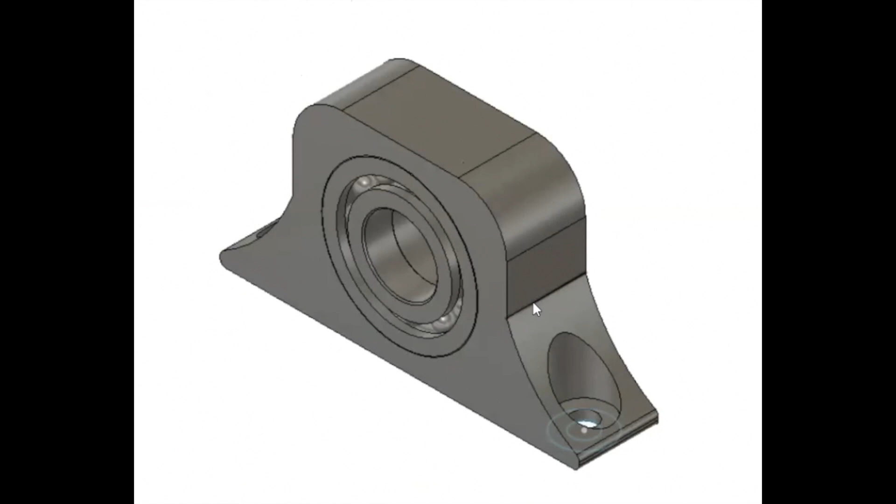The first thing we're going to do is go into the McMaster Carr catalog and search for a bearing. The bearing we're going to use is 3/4 inch diameter on the inside and 1.625 inches on the outside diameter.

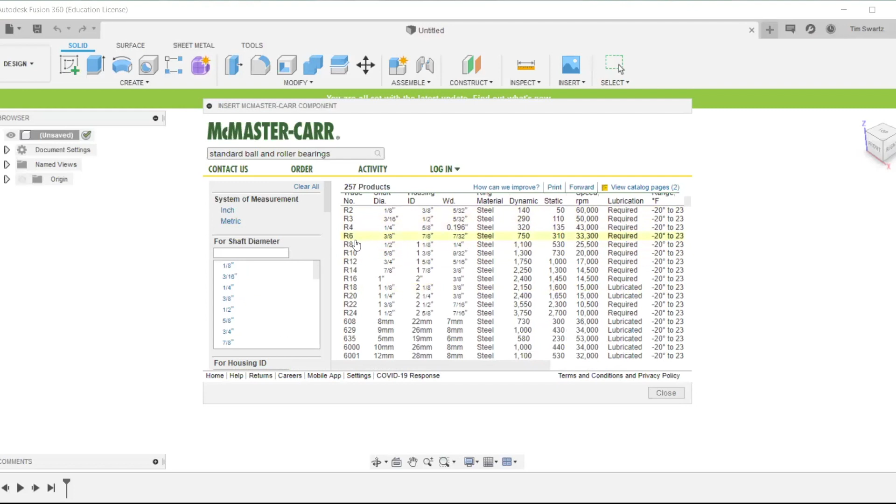We can see that in the specifications when we pull this product up. We'll scroll down here, and right now we're going to save it, and that's going to directly import into our drawing.

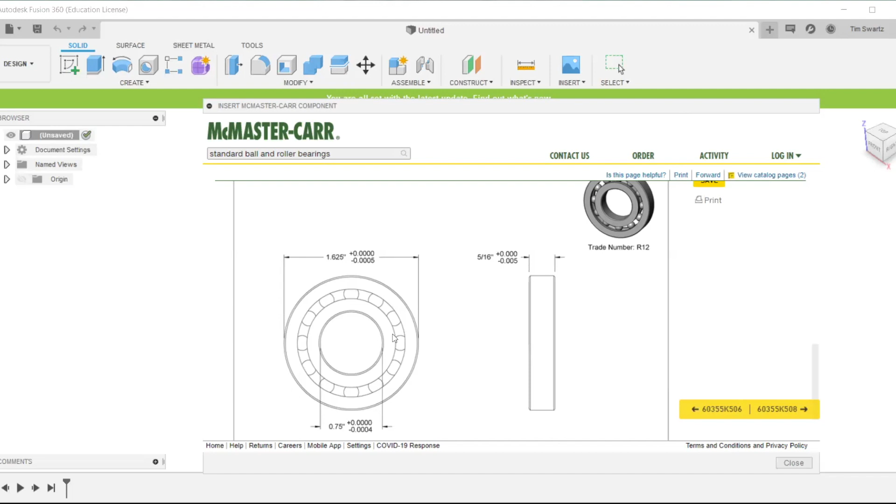Take note of the dimensions of the bearing. You can see that it's 5/16 wide, it's 1.625 inches across, and its inside diameter is 0.75.

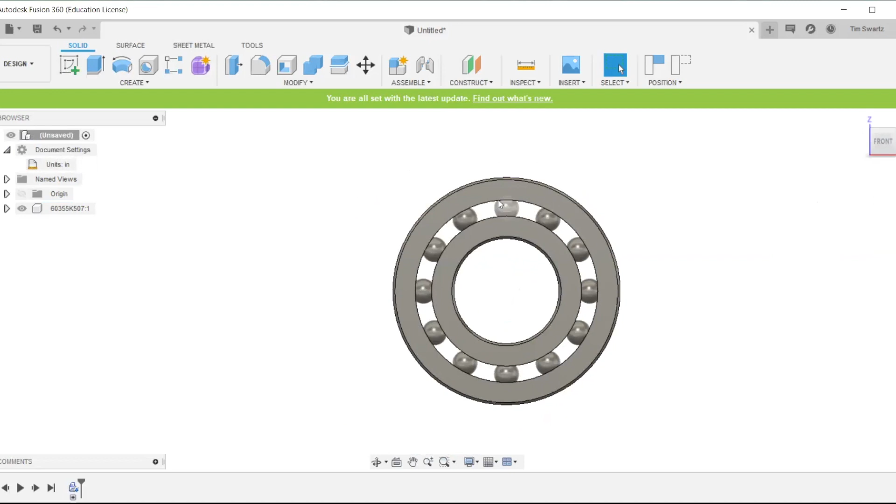Now that it's imported, we're just going to arrange it how we want it, so we want it front facing. One thing we need to adjust is the units that the program is in, so we're just going to switch that over to inches since this bearing is in inches.

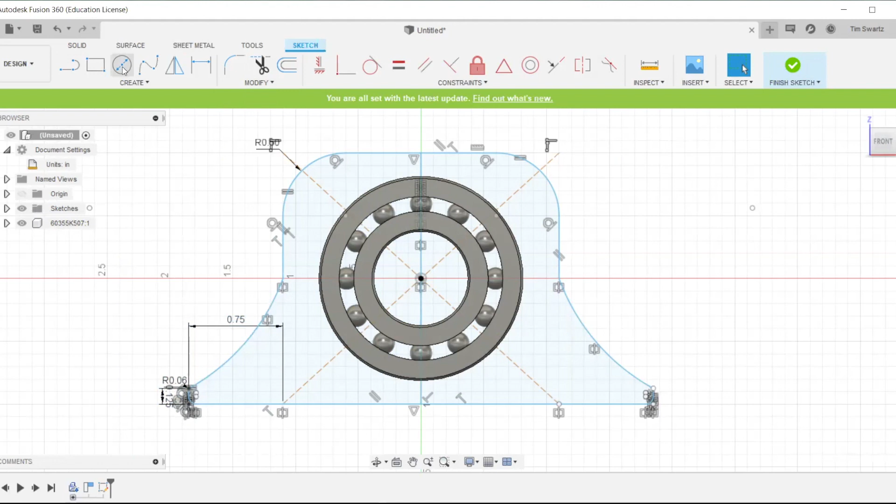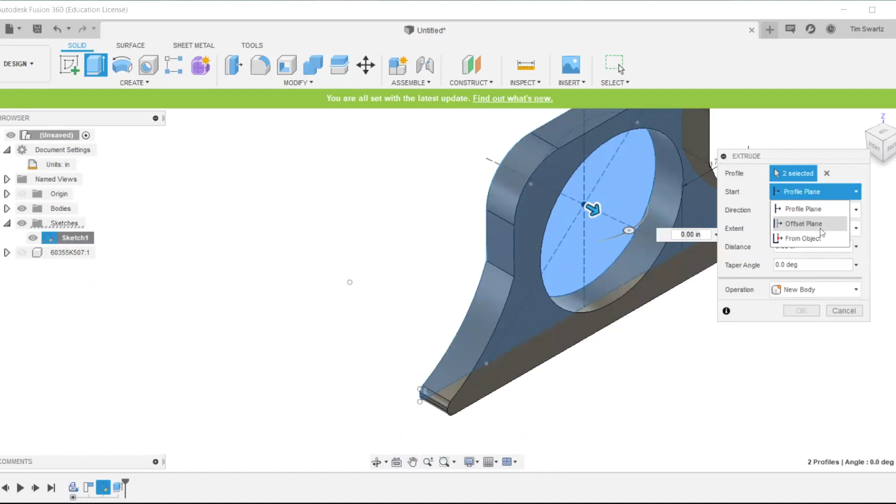Here we've extruded our part so that it is 5/16 of an inch thick. Now we're going to use the press and pull so that we can get a full piece in the back, because what we're going to use it for is a shoulder to hold the bearing, and then we're going to put a through hole through it.

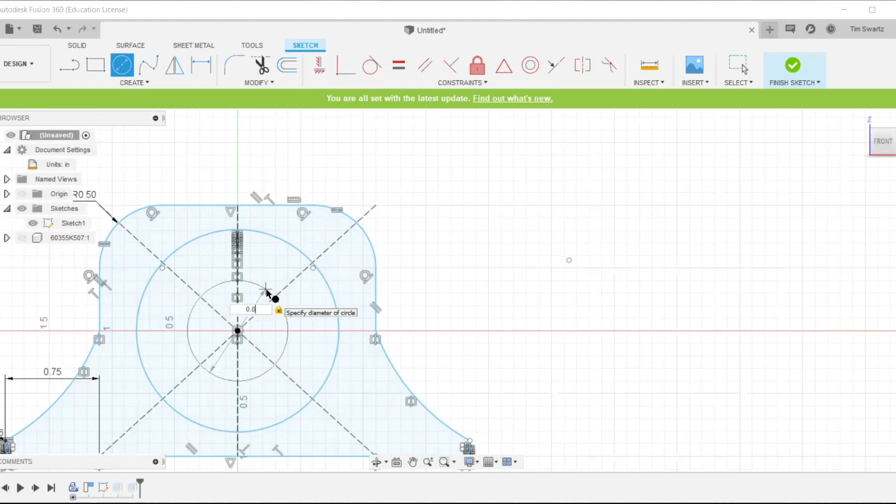Now I'm about to sketch the through hole, and we read on the blueprint that it was 0.75 inches, but I'm going to put 0.8 since this is just a pass-through. I'm not actually using this to support the rod, that's the job of the bearing. We're just going to have it so there's a little bit more tolerance there for our axle.

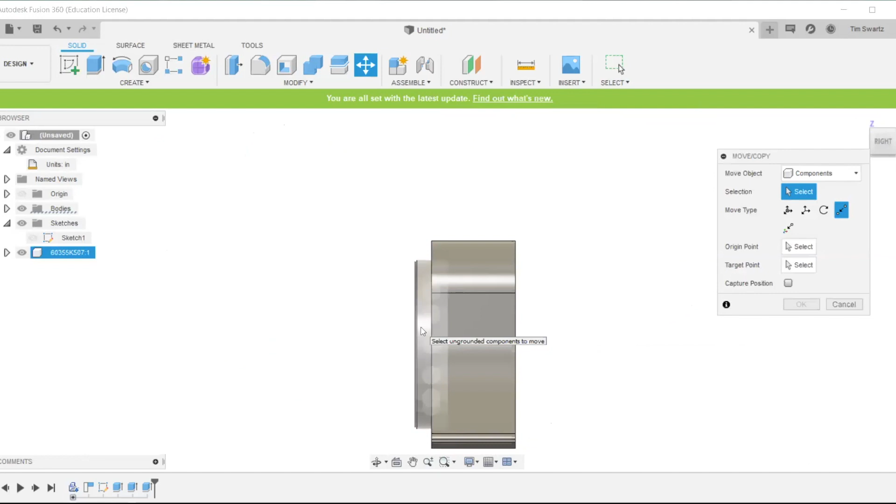Now I just turn the hidden edges on so that when I move my bearing in there, I can have it so that it is right up against that shoulder.

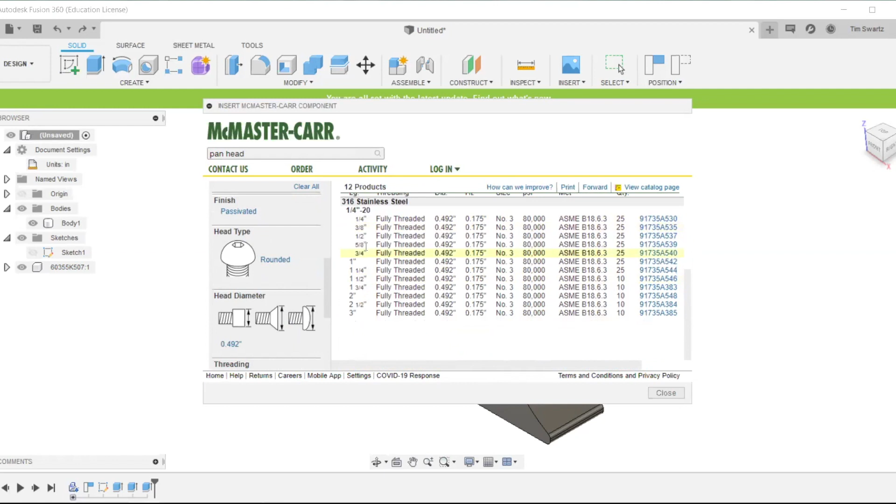Back in the McMaster Carr app, I'm going through and finding the bolt that I want, and I'm going to import that in, and then I'm going to add a hole so that that can be placed.

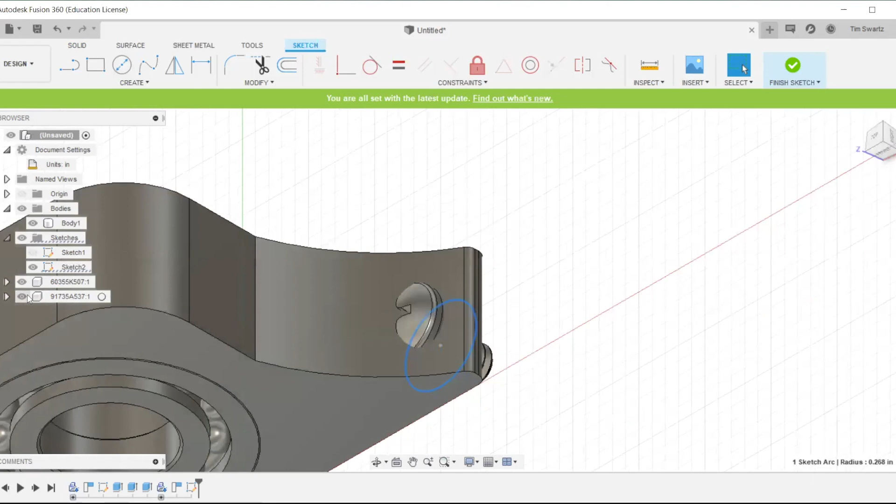I simply go in the top view and create a circle in a new sketch, and then extrude that circle. I add an offset of 0.1 inches so that the hole does not go all the way through. In the next step, I'll add a second circle for the bolt to pass through.

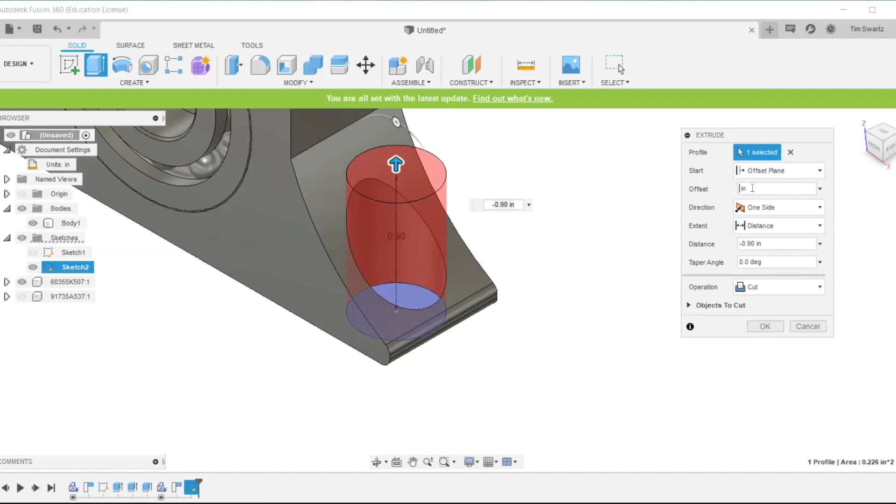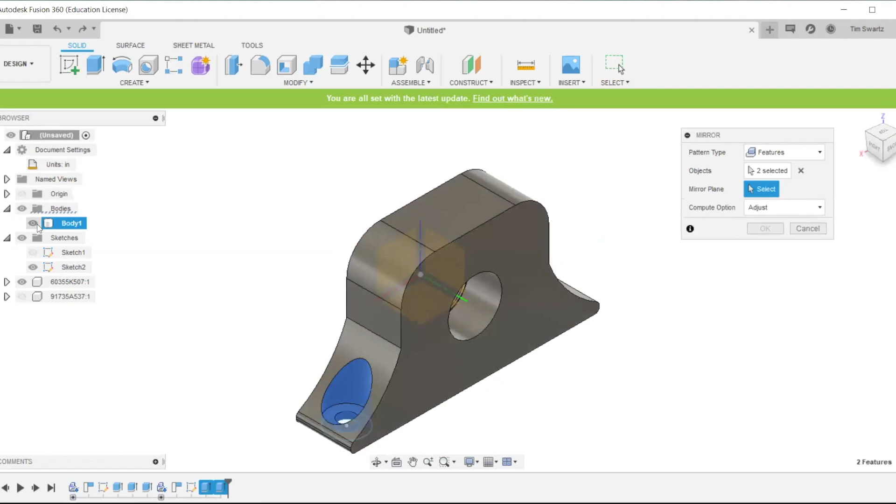Now we're just going to mirror it. You're going to select mirror and then features, and then select that feature, which is the hole, and then you're going to use the plane to mirror it since we built it on the origin.